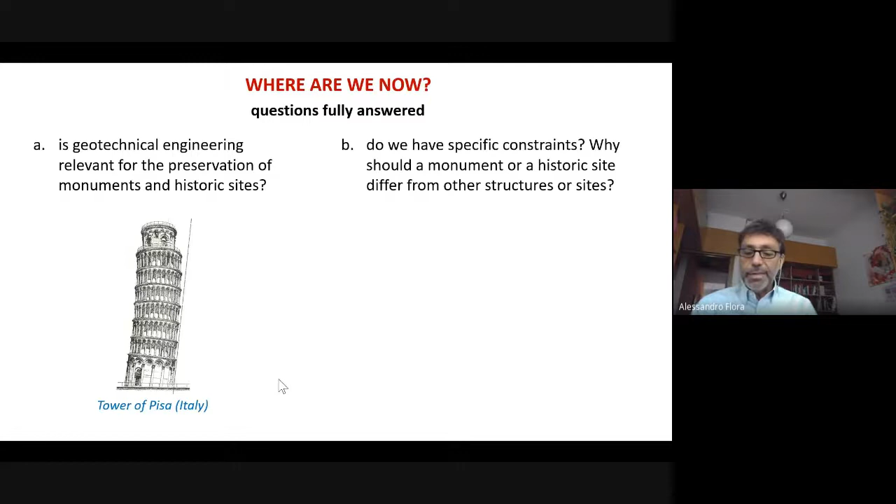And another question which has been fully answered, in my opinion, is, do we have specific constraints? I mean, why should a monument or a historic site differ from other structures or sites? This is not a trivial question, in my opinion, but we now know that we have constraints. You see here in this chart, I will go back to this chart in the second part of my presentation, but I recall it here to remind you that when we deal with monuments we have some constraints in terms of iconic integrity, material integrity, historical integrity, authenticity, which is an elusive concept, but is also very important. And you know, the amount of actions you can do are summarized here.

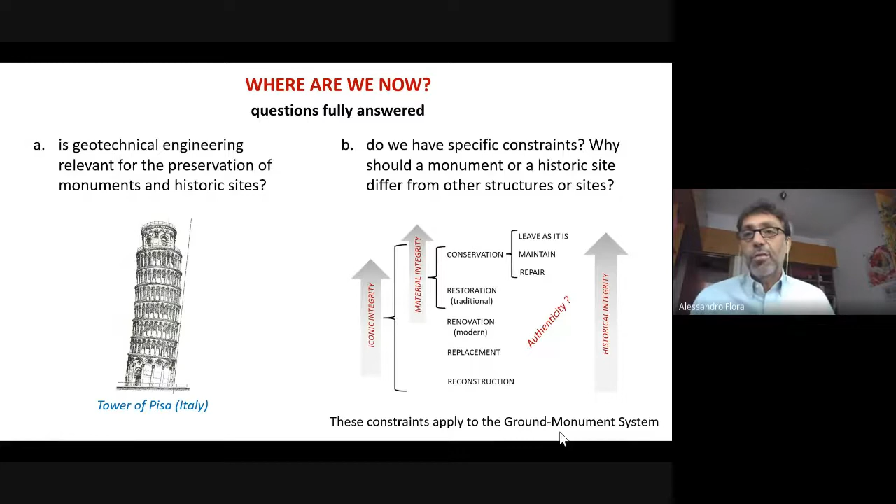So we know that there have been charters issued in the last century that deal with the constraints we have. So the question is answered because yes, we do have constraints, and these constraints apply, as you see down here, to the whole ground-monument system. That means that they apply also to geotechnical problems. So we have to face these constraints. We cannot do anything we want on monuments.

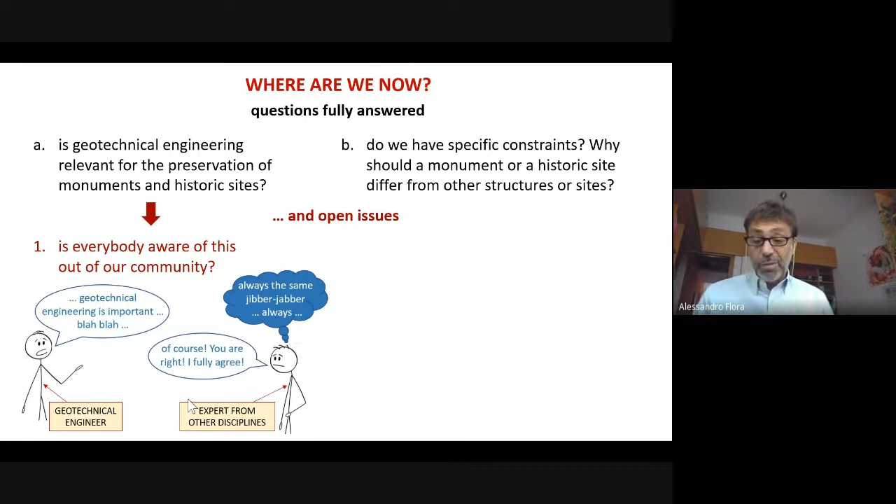Now, if these are the questions fully answered, in my opinion, there are also open issues that say that it is still worth working on this topic. What are these open issues? Well, I list here the main ones in my opinion, of course. The first one is: is everybody out of our community aware of our role? Because we have the experience. You see here a sketch of a geotechnical engineer speaking with some experts from other disciplines. You know, we always try to say that our job is important, and sometimes people are kind to us. They say, yes, of course, but maybe this is not always true, and so they do not involve geotechnical engineers all the time they should be involved. So the first problem is if everybody is aware of the relevance of geotechnical engineering in the preservation of monuments.

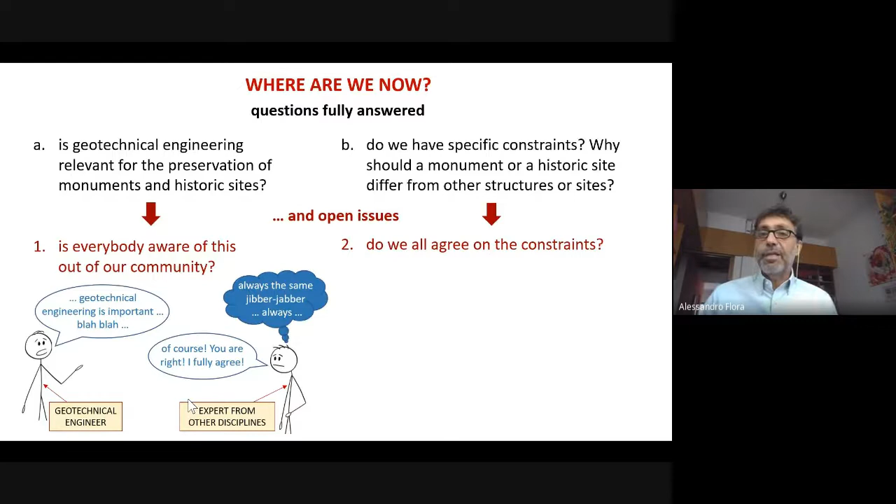A second question is if we all agree on the constraints. We have constraints when we have to approach the monuments, but do we agree on what these constraints are? This is something to be discussed, in my opinion. And the third open issue I have listed here is how big is the gap between theory and practice? Because in conferences and papers, you usually see very nice applications of geotechnical engineering to the preservation of monuments and historic sites. But is this always the case? Or maybe there is a gap, and in practice they don't always do what in theory we say they should do.

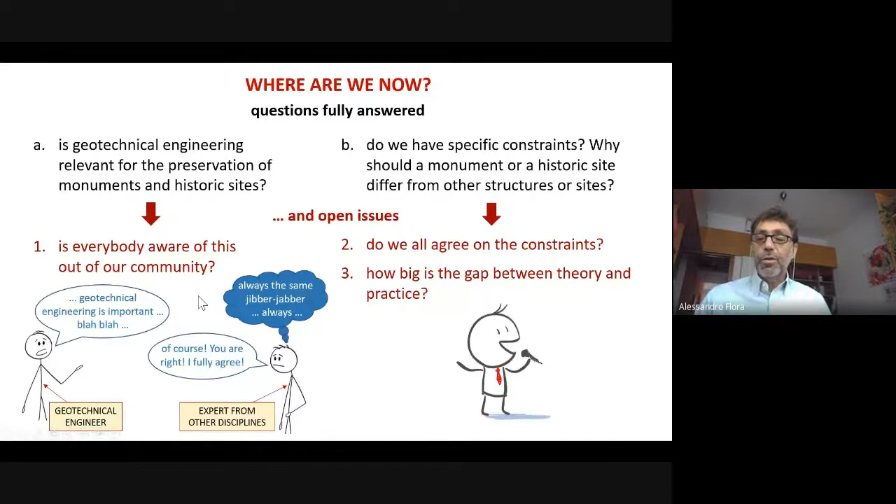So in this lecture I will go through these three issues using some of my personal experiences in the preservation of monuments or historic sites to try and propose a possible answer, which is not definitive, and of course these are topics to be discussed.

Now let's start with the first issue. Is everybody aware of the relevance of geotechnical engineering? Let me start with an example in which I've been recently involved in Central America. It is a Maya site, actually an acropolis in a site named Copan in Honduras.

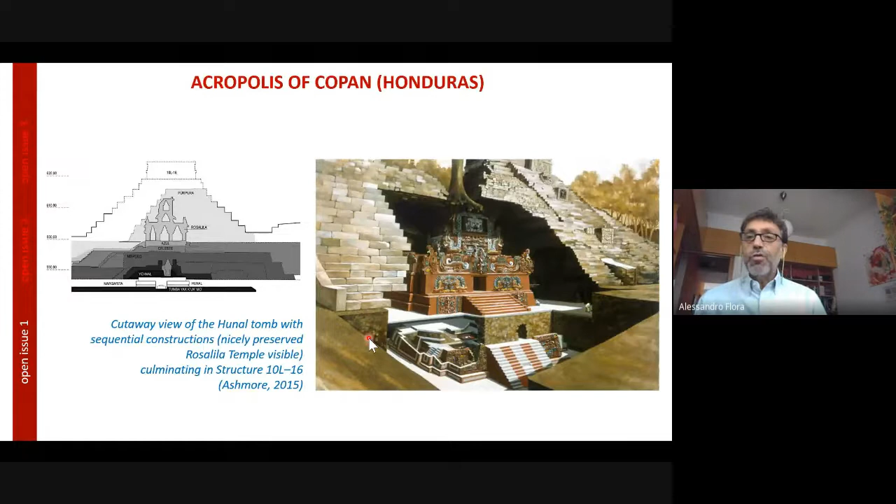What the archaeologists have understood is that the Maya, when the city was growing in importance and size, needed larger monuments. So instead of building new monuments in different sites, they built the new monuments on top of the old ones. So the monuments we see now are a sort of onion with inner layers of older Maya structures. You see here an example of what the archaeologists found in one of the pyramids. Fantastic layering, very important monuments, really worth looking for.

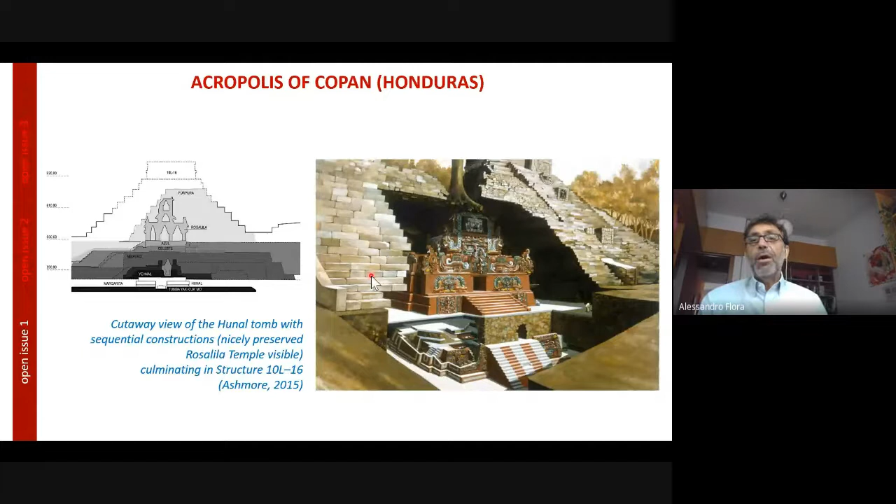Now, how did the archaeologists look for that? They excavated narrow tunnels, about 1.5 meters wide and 2.5 meters high, so very narrow. When the Maya built the larger pyramids, they buried the old structure with unsaturated fine-grained soil, compacted by hand with the technologies they had at the time. So it was an embankment in all cases, and the tunnels were excavated through these embankments.

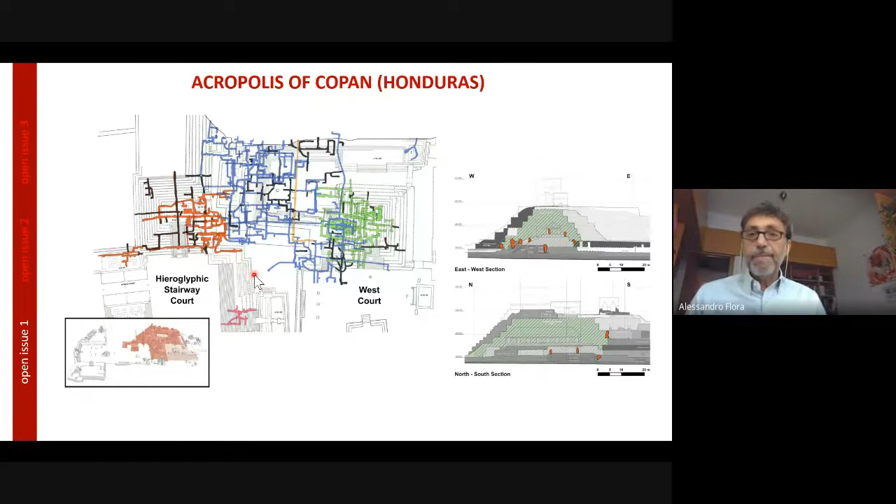You see here an example of the crazy network of tunnels under the Acropolis, because they didn't know what they were looking for. They went forward, found a wall, and turned left or right, down or up. So it is a crazy network, both from a planimetric and an altimetric point of view. This posed a problem, because they started to have collapses in the tunnels. So they started to detect in detail the shape and position of the tunnels. You see here an example of scanning of part of these tunnels.

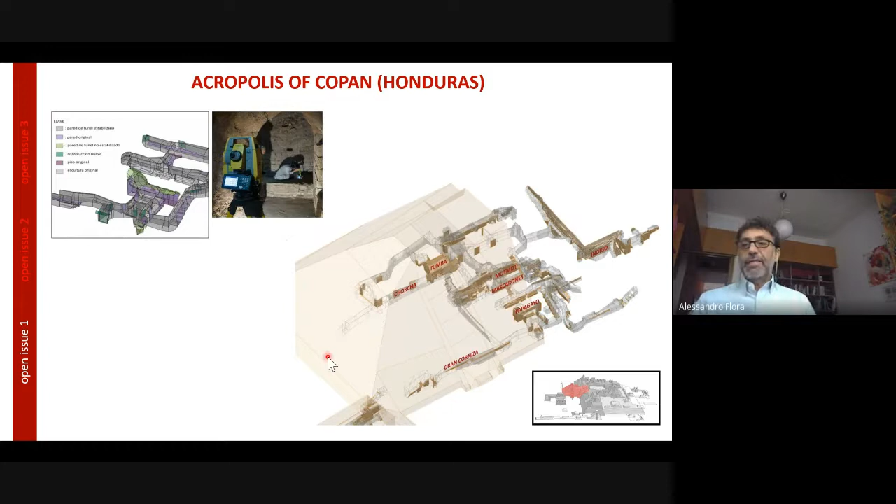Originally all the tunnels were unlined, but as soon as they saw some stability problems, they put different linings on site, in a very spontaneous way, not systematically designed. In the very first cases, like in this figure, they also tried to mimic, which you shouldn't do, the original Maya structure, which also poses some problems to the archaeologists nowadays.

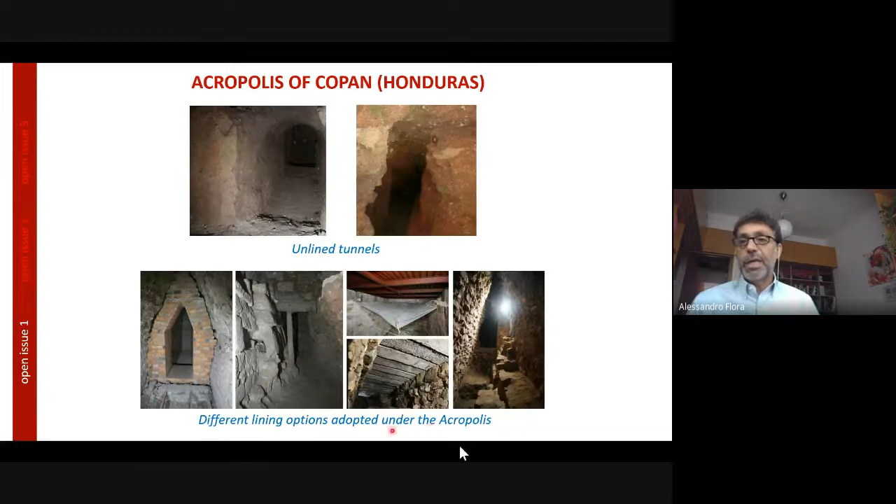All these tunnels are very important, because excavating still reveals extremely fine pieces of art and carved stones inside the big pyramids. So it is very important to keep this pattern of tunnels open, also for tourist visits, because the site is becoming more and more important from this point of view. Now, you see here in one part of the Acropolis the areas where they had problems recently, in the 3 years between 2017 and 2020.

In red, you see the areas where they had large collapses in the tunnels, and in blue, where they had very big water intrusion when they had rain. You see here examples of some local collapses. Most times, and now we understand why, these collapses were triggered at the interface between the lined stretch of the tunnel and the unlined stretch behind.

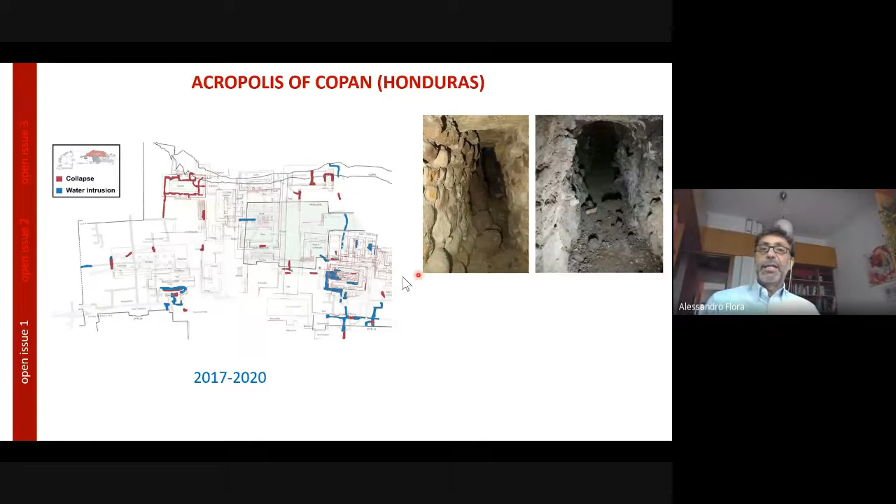Now, you see here that the water was critical. In the 90s, they put an impermeable membrane in one of the plazas, but when Hurricane Mitch struck the area, they got even worse collapses in the tunnels around the border of this, because there was no correct water collection. The water was not collected correctly on the plaza and disposed of, so they had higher infiltration on the border.

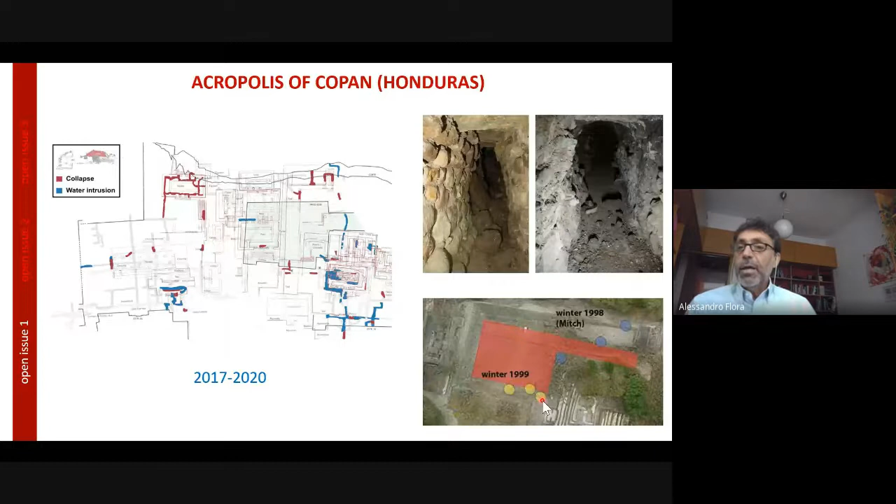Now, why am I telling you all of this? Because clearly there is a problem with water. And the archaeologists from Harvard, who have been working for 50 years at this site, clearly knew it was a problem of water, but they, being archaeologists, had no clear understanding of why it was a problem.

So in 2018 they called Professor Paulo Lourenço from Portugal, who is a famous expert in the preservation of monuments and historic sites, but he's a structural engineer. And when he saw the problem, he immediately understood it was mostly a geotechnical problem. So he was kind enough to involve me in this work.

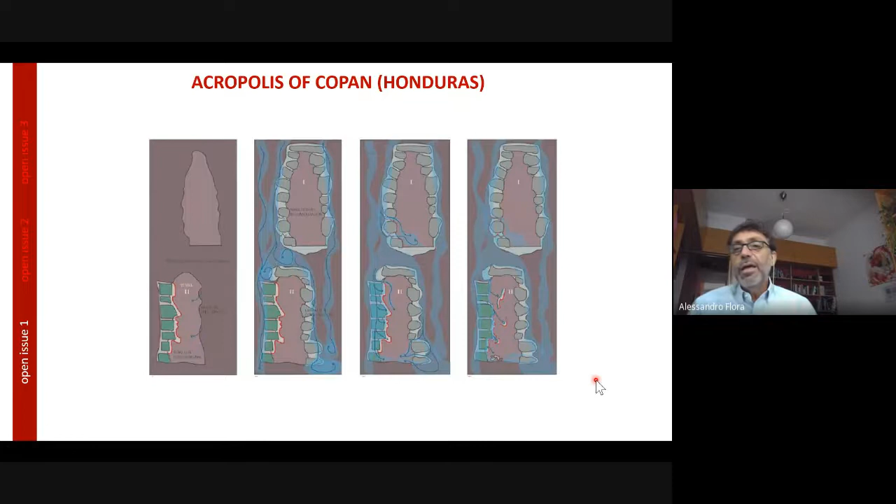So we went to Harvard, we discussed with the archaeologists, and it was relatively simple to understand what the problem was. From a geotechnical point of view, it is actually a trivial problem, because obviously it is a fine-grained material, unsaturated, so of course there is suction in the material, which is a function of the degree of saturation. We could demonstrate by carrying out numerical analysis that this degree of saturation had an effect on stability by introducing an apparent cohesion, which we used in the numerical analysis as a state parameter.

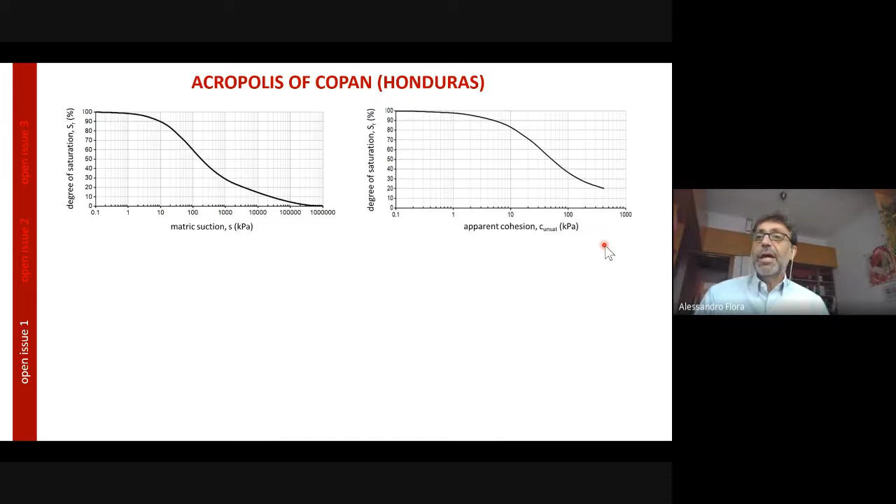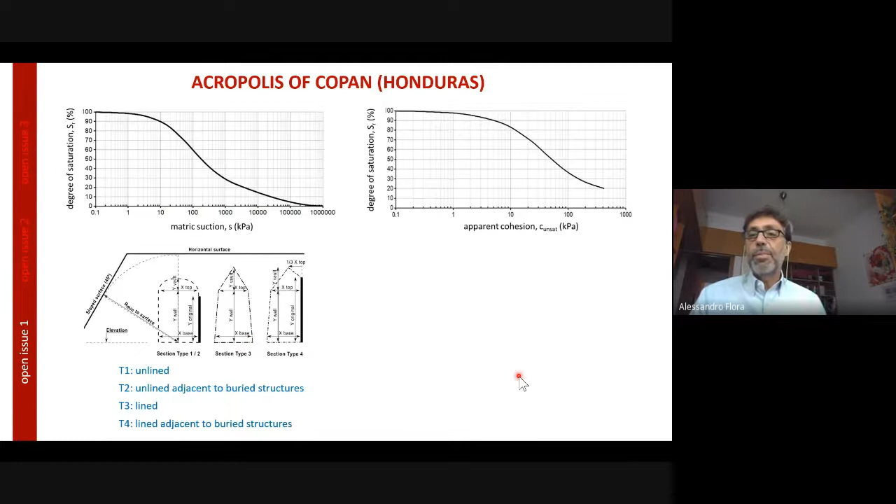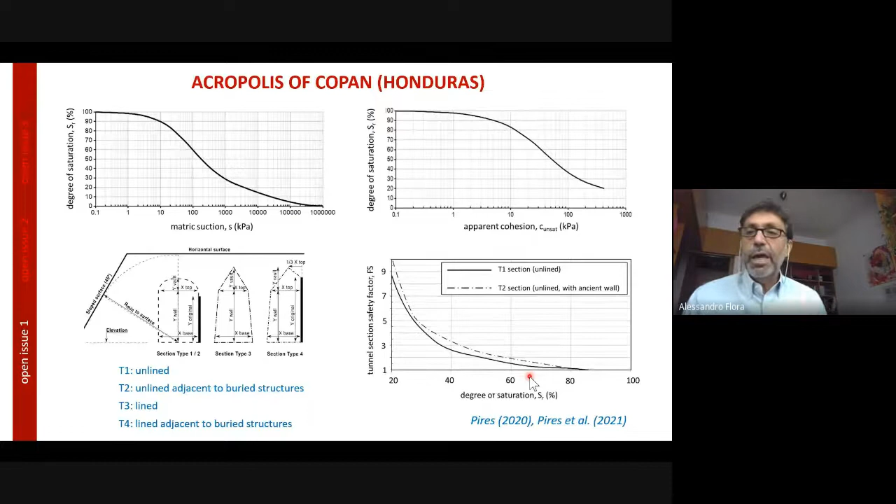So we were able to tell the archaeologists that there is a limiting degree of saturation that shouldn't be overcome to avoid collapse. If this is true, and it seems logical, then it is very easy to think of solutions. Of course, we found that the decrease of suction may be critical, and therefore we need some actions in the medium and long term. Of course, there is always a problem of money when you're working on this kind of site.

So the first thing to do is the need for proper rainwater collection, new lining to be added in the tunnels where possible, but where it is not possible and the tunnels are dangerous because collapse can happen, we suggest to backfill, to close the critical stretches in the short term. Of course, excavating new tunnels elsewhere for safety reasons.

You see here a picture we took in Harvard, at the clubhouse in Harvard. This is Paolo Lourenço, this is myself. These are the leading archaeologists from Harvard, William and Barbara Fash, and all the people also from the Instituto Hondureño de Antropología e Historia, the Honduran institution taking care of the site.

Now, I've shown you this example to show that in this case, good cooperation led to the solution, because from a geotechnical point of view, the solution was easy. It was necessary to work together. So this symbolizes the need for cooperation to solve the problems, because you need skills from different expertise.

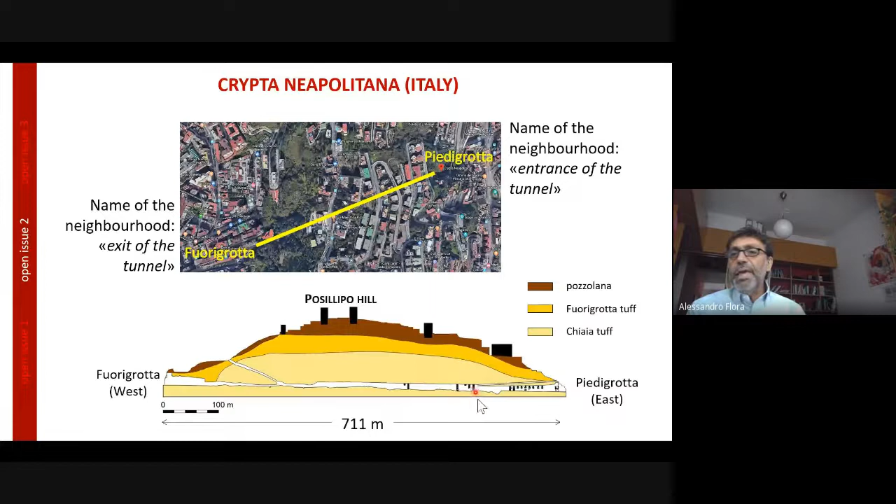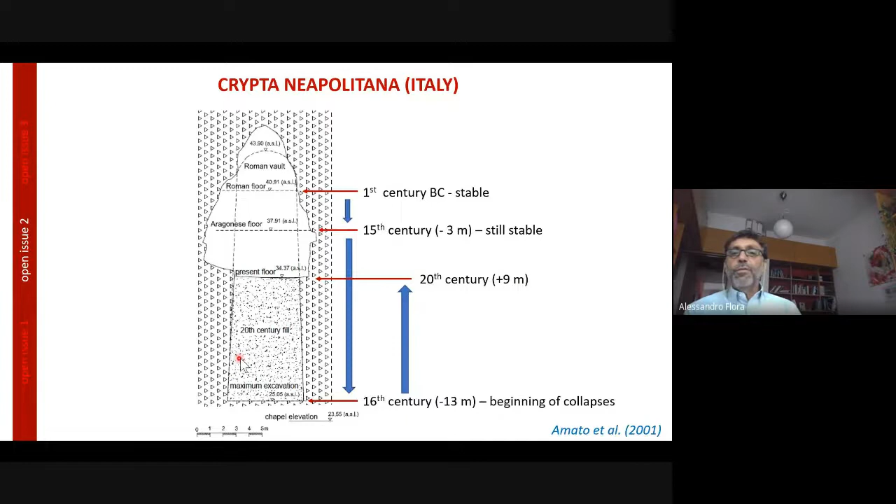I go back here to show that there were masonry arches put in later, but they collapsed in time. So in the 20th century, they decided to fill part of the section, but it was still mostly unstable. So in 1930, the tunnel was closed, and since then it has remained closed. If you ask young Napolitan people what the Crypta Neapolitana is, they don't even know, while it was once the most important road in Naples for a long period. It's really a shame.

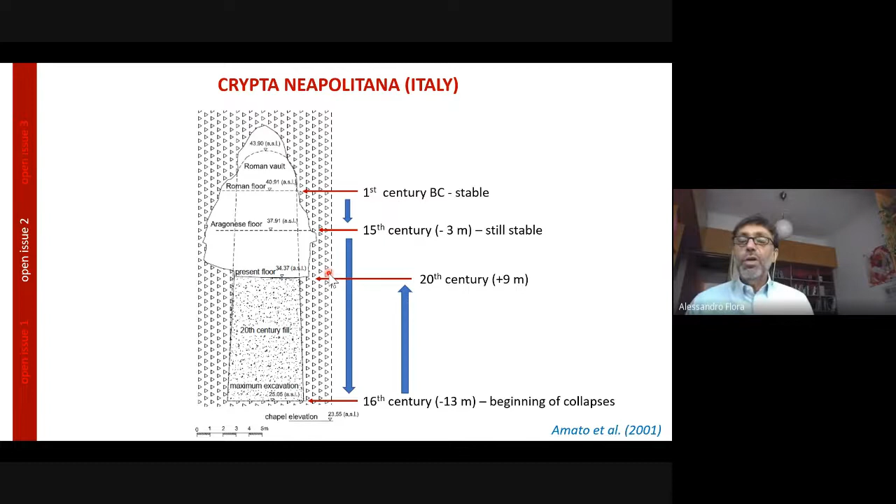I will not go into details of this, but we decided to carry out some numerical analysis. For instance, I will show the analysis in these six sections, from A to F. You see they have different shapes, different cross sections, because they mostly failed at different times in the past.

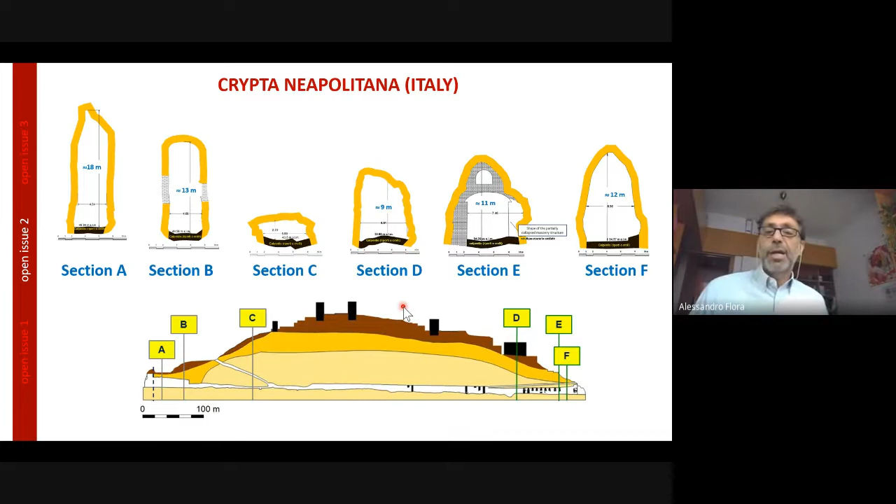These are, very briefly, the outcomes of our numerical analysis, in which we found that the safety factor in the most critical sections is basically 1, confirming the extremely critical situation.

I won't enter into detail, but the numerical analysis also told us where the most critical situations are, and confirmed that tensile failure of the side walls—the white dots are tensile failure dots—are extremely critical, driving our possible solutions.

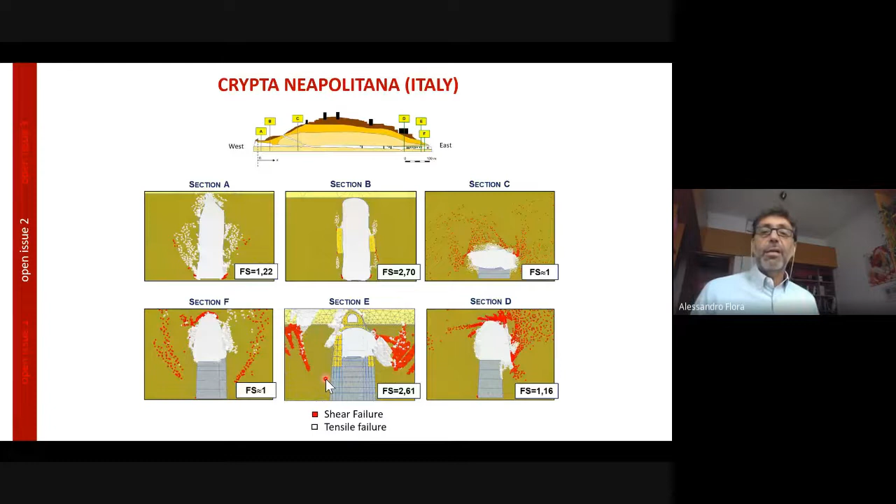So now, again, we should go back to the discussion on the constraints, which is why I'm showing this example. If we want to be very strict in respecting the constraints, we should keep the tunnel closed, because we cannot do anything with it—it's too dangerous, as you see here.

But should we really do that? In my opinion, we can bring this historic site back to the role it once had. It was a connecting path, a very important path. So why not bring it back?

This is the proposal we are carrying out, and we are working on this with the municipality of Naples, because if we believe that functional integrity is a value, then even though we know we are losing some traces of its history, we can carry out works and interventions to restore this monument, this very relevant site, to the role it had in the past.

So what should we do? Removal of small unstable blocks, bolting of larger blocks, partial reshaping, and insertion of a lining—of course, leaving windows to see the old shape and the old masonry—and, of course, supporting the Bourbon arches like this one that are partially collapsed.

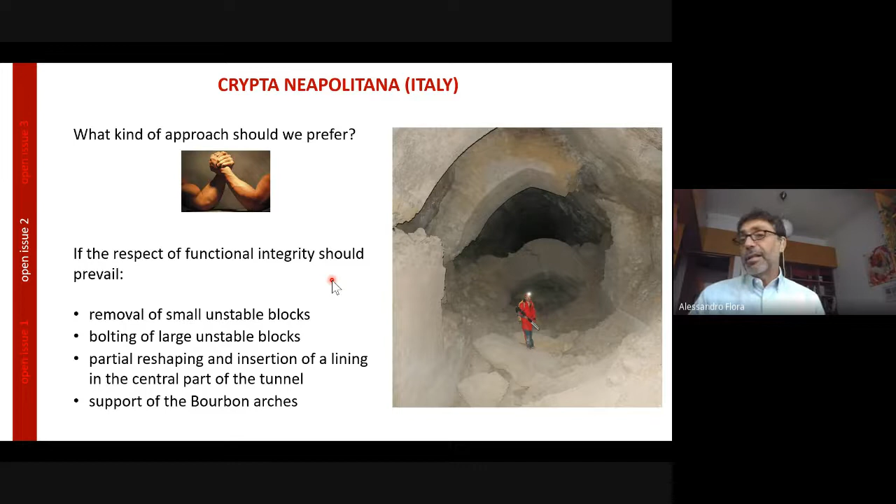Now, let's go to the third and final issue I was mentioning in my introductory part, which is how big the gap is between theory and practice. In a way this can be considered an impolite question, because to answer it we need to show something which has not been done in a perfect way.

I will do this by showing an example I'm currently working on with my Turkish colleagues: the so-called Theodosian walls of Constantinople in Turkey. Constantinople is the old name of Istanbul, so this is Istanbul.

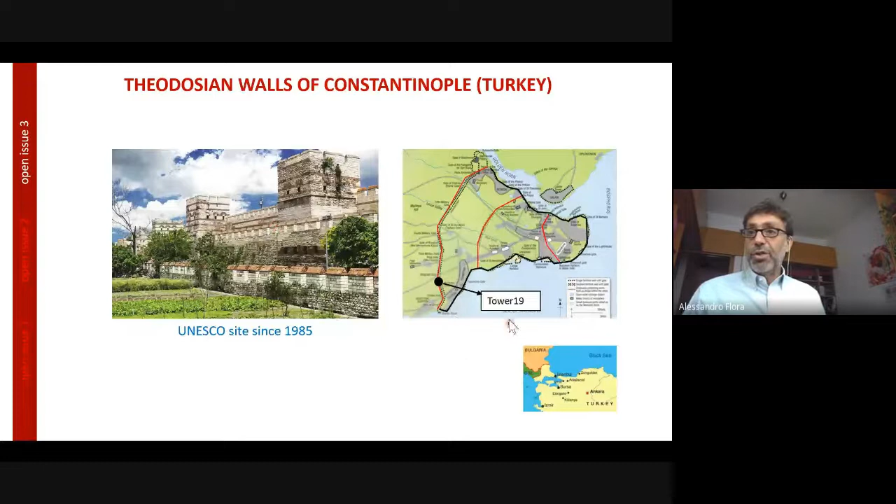Now, it has been a UNESCO site since 1985, and this date is important because after it, they decided to carry out heavy interventions. I will briefly introduce what these walls are, and then go into some detail on the behavior of one of the towers, named Tower 19. This defensive system, built in the 4th to 5th century after Christ, was an impressive defensive system.

Look at here, there are two walls, an inner wall and an outer wall, with a system of towers, inner towers and outer towers, with a site on which the soldiers were at a higher level compared to the possible besiegers, and also a moat which made it very difficult for attacking soldiers to get to the walls.

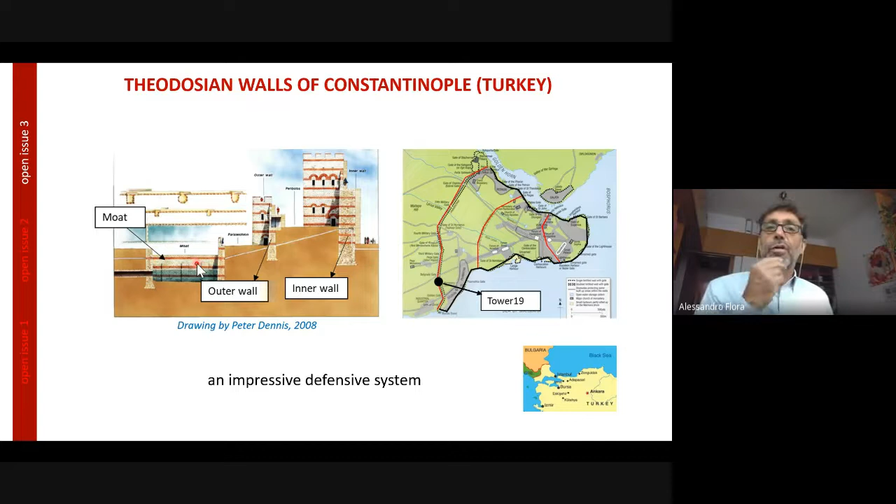Now, it was indeed an impressive system. It became legendary during the Middle Ages. It was constructed by the Byzantine, as I told you, during the 5th century.

And of course, the walls and towers were immediately struck by heavy earthquakes, because it is a very seismic area, as you probably know. But then for many centuries, they had heavy attacks from different armies, but they never surrendered because they were basically invincible.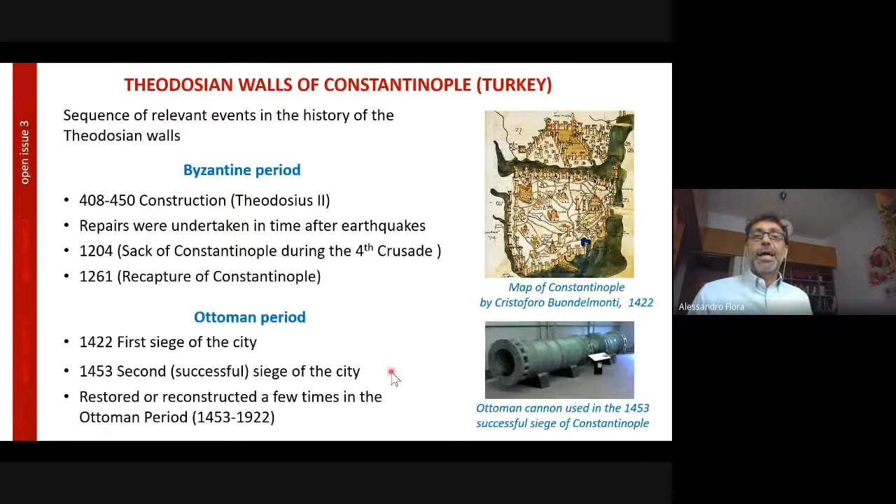They surrendered during the Byzantine period only once, because the Crusaders, in a way, made an unexpected sack of the city, and therefore the city was taken, but then was recaptured by the Byzantine, even though the decadence had started. Then the Ottomans came, and after an unsuccessful siege in 1422, in 1453, thanks to the cannons they had at that time, they succeeded in getting the walls and also the town, and they started the Ottoman Empire, which survived till 1922.

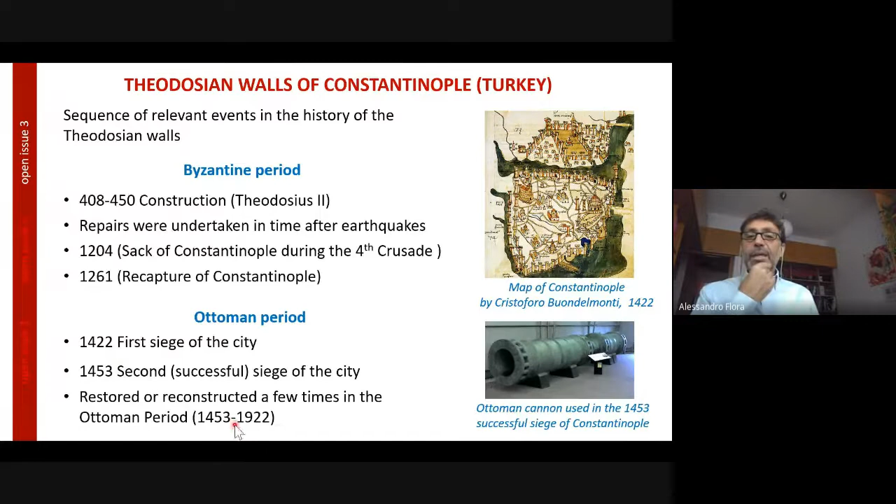Now the walls, you see here a sketch, probably the Ottomans were able to destroy with the cannons the very heavy and important, impressive defensive system, which without the fire weapons probably could not have been possible.

It is important to say that the walls were defeated by people only a couple of times, as I told you, but they were destroyed quite a few times by earthquakes. So there has been a continuous battle between man and nature. Nature was destroying most of the walls, and the inhabitants were rebuilding them.

You see here a map of the main earthquakes in the last 2,000 years, as reconstructed by Ambraseys. And you see here, our tower T19 is here. This is Istanbul. And in 1999, what happened? There was a very strong earthquake, the so-called Kocaeli earthquake, which struck also Istanbul, damaging the towers.

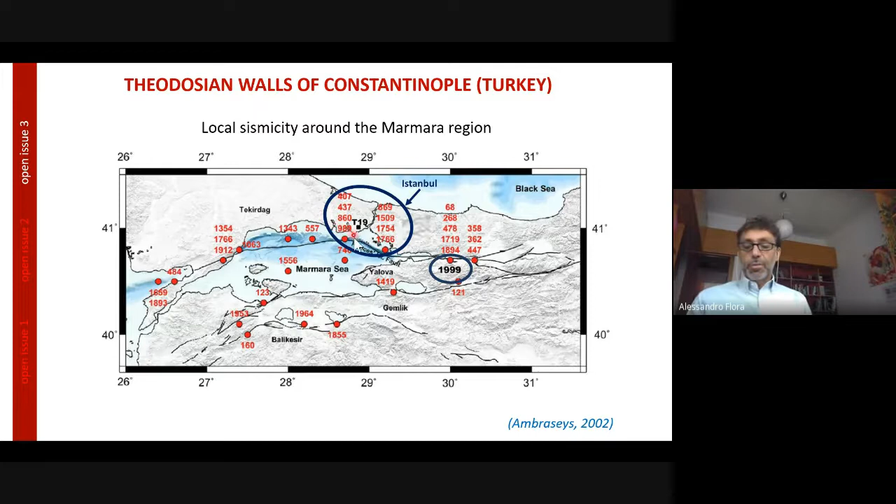Now, let's go to tower T19, which is this one, as you see here. Because since it became a UNESCO site, the authorities decided to heavily reconstruct the walls and the towers. So they reconstructed by mimicking, by simulating, using the old technology.

So as you see here, for instance, in our tower, there was an original Byzantine wall part of the structure. There was an original Ottoman part without the band stripes, the brick bands that the Byzantine used. And then the part that was reconstructed on the side was reconstructed using Byzantine technique.

So from the point of view of constraints, there was no respect. And actually, not only in terms of integrity and authenticity, but also from the functional point of view, because this tower is not defending the town anymore. So there is no functional integrity to set back. Anyway, they had rebuilt the tower as new, and others as well.

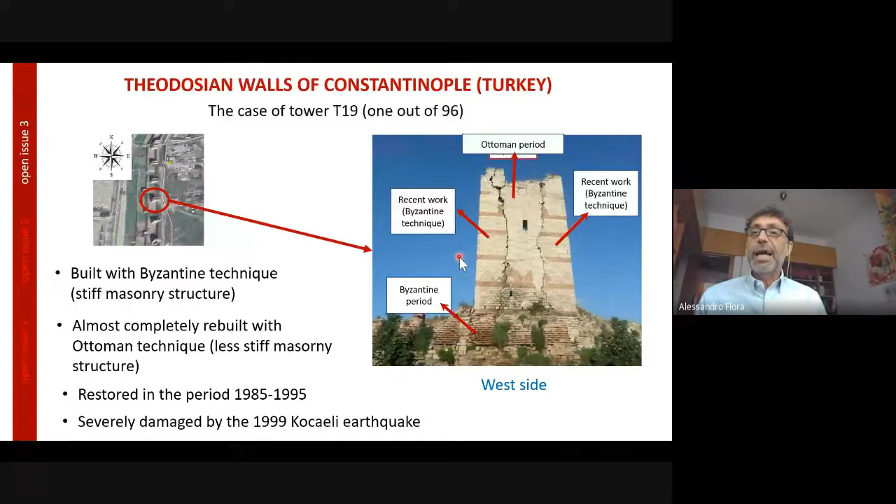But then the earthquake came in 1999 and destroyed most of them. As you see here, you see the different sides of this tower T19. Parts were collapsed, large cracks. You see here typical seismic cracks. This block is on the verge of collapsing. So there was big damage to the wall as well.

Now I'd like to quote this sentence from Professor Ahunbay, who is the chair of historic preservation at Istanbul Technical University. This is what he said after the 1999 earthquake. I quote: 'The restoration campaign of the 1980s must be criticized due to its resort to the reconstruction of ruined towers and gates instead of stabilizing and consolidating dangerous structures.'

The performance of the 20th century repairs, the ones I told you, during the recent 1999 earthquake constitutes a good lesson for future restoration. So Professor Ahunbay is saying, why did you concentrate on the shape? Now we have the knowledge to do better. Why should we keep going on and on in this endless game between man and nature in the destruction of this structure?

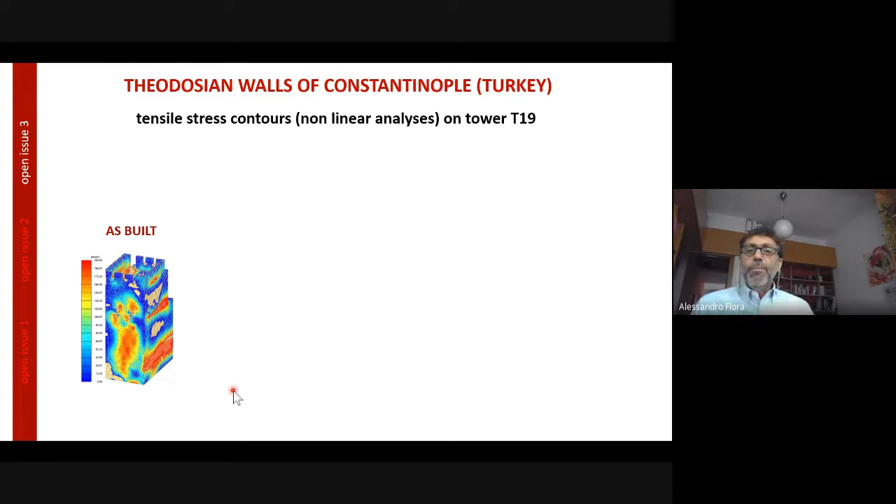So we also considered what would have happened if we had some mitigation measures. For instance, I am working now on a very soft action, which is lateral disconnection at the foundation level. If you disconnect a foundation, you highly decrease the rotational stiffness, so increase the compliance, and so you increase the elongation of the natural period, in terms of equivalent elastic behavior. But you see from the nonlinear analysis that since the foundation is too shallow, still there are very critical sections in which the masonry fails under the seismic action.

So we also consider different options like soft barriers. We are working on a geotechnical seismic isolation technique, which is a soft grouting in which you inject a grout which has a low normal stiffness on the sides and a low shear stiffness on the base, and the situation gets better. You see the colors become cooler, tending to blue, but still this is not sufficient, and to be honest, it is also a very complex way to intervene on a site.

The best option would be moving in the other direction. Instead of lowering the stiffness at the base, at the foundation level, you can grout around the base, stiffening the soil, so moving towards the origin of the response spectrum. And if you also do some retrofitting, so some intervention on the masonry, you can have

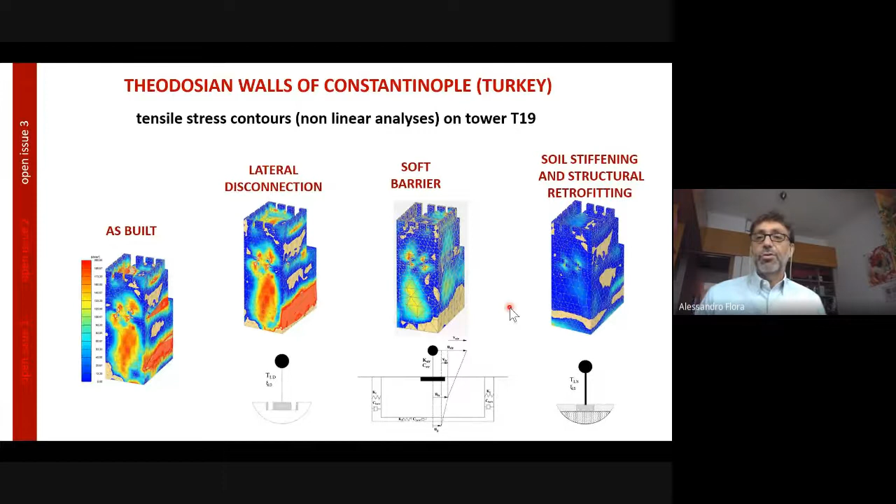on the role of geotechnical engineering in terms of the risk of lack of cooperation, it is obviously essential to share the responsibility of technical solutions with experts from other disciplines. We have said that. This cannot be but based on multidisciplinary considerations, but of course, this multidisciplinarity must include geotechnical engineering. We have tried to demonstrate that most times geotechnical engineering is important to understand the critical situations and to propose respectful interventions. So this is in terms of lack of cooperation.

In terms of cultural isolation, I'm speaking to people mostly from Asia, and I'm from Europe. I am fully aware that in past preservation actions, the framework has been mostly European, Europe-centered, let's say, which is not what it should be, in my opinion. First of all, let me say that hibernation of heritage is not the only solution. So we shouldn't freeze the cities as they are. We should not be afraid to intervene on the structures because it can be worth it to increase the functional integrity, possibly to bring it back to where it was.

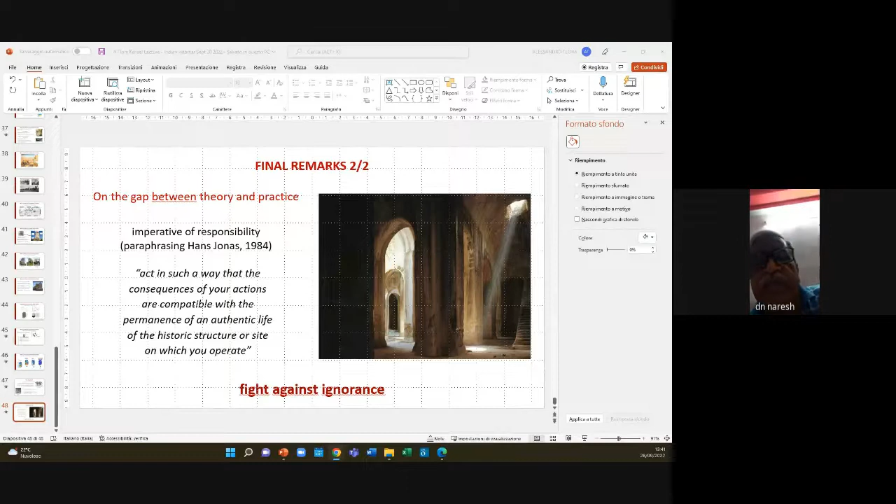You mentioned geotechnical engineering looks at multidisciplinary considerations. In your tunnel, first done by Rome, later in the 15th century, and today we have the tunnel boring machine, developed by Germans and used in our metros, and also in Naples. So why was this not used?

Well, because in the tunnel that you have mentioned, there is no need. I mean, tunnel machines, first of all, are extremely expensive tools, and they are usually used, at least in Italy, for long tunnels. It's worth using tunnel boring machines for large tunnels, long tunnels. This is not so long. Then the tunnel exists, so there is no need for such a heavy intervention.

I mean, it is absolutely possible. There is not much to excavate. There is much more to sustain on the sides or to remove the blocks. Because if you put in place a tunnel boring machine with precast facing, you would have a modern tunnel, which is not the case. We want to have functional integrity. That is, we want to allow people to go through, use the tunnel again. But still, when they walk into the tunnel, we would like them to see that they are in a very historic tunnel, not in a subway tunnel.

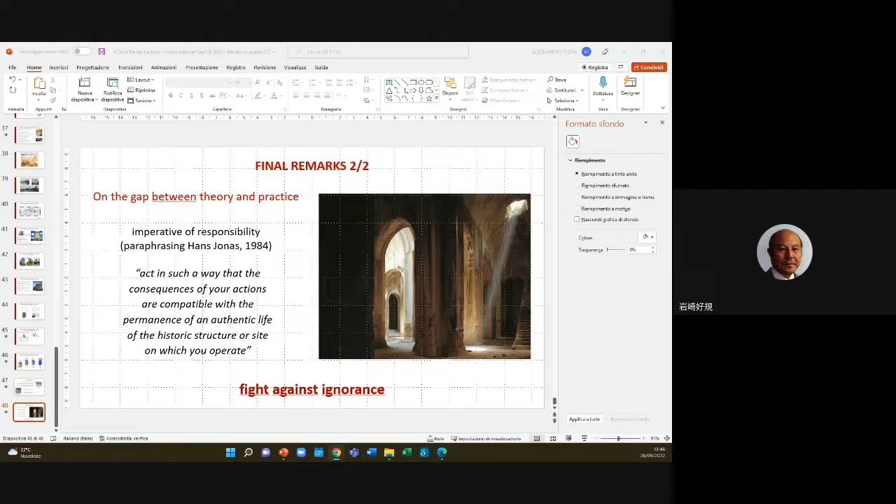The next one is the Tower 19. Tower 19, what? Seismic response. Please show me the ground layers for the response analysis. Yes. You mean now? Now, yeah. Let me. Do you see my screen? Yes. Let me show you here.

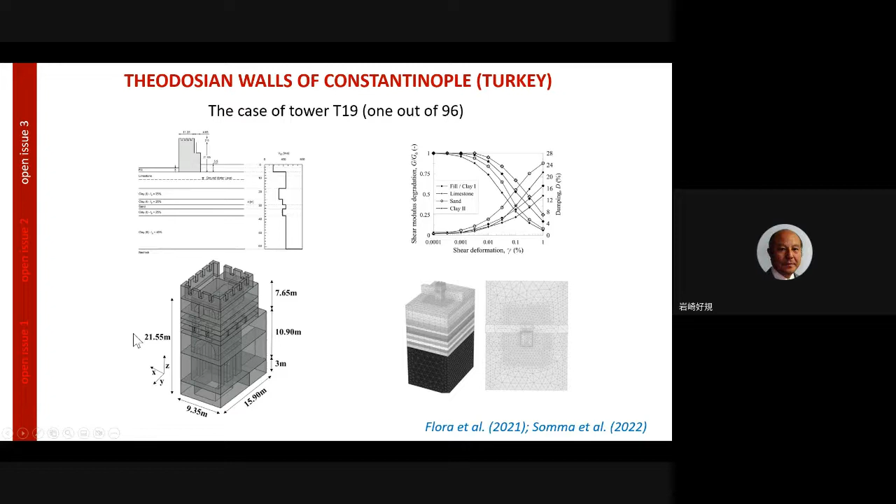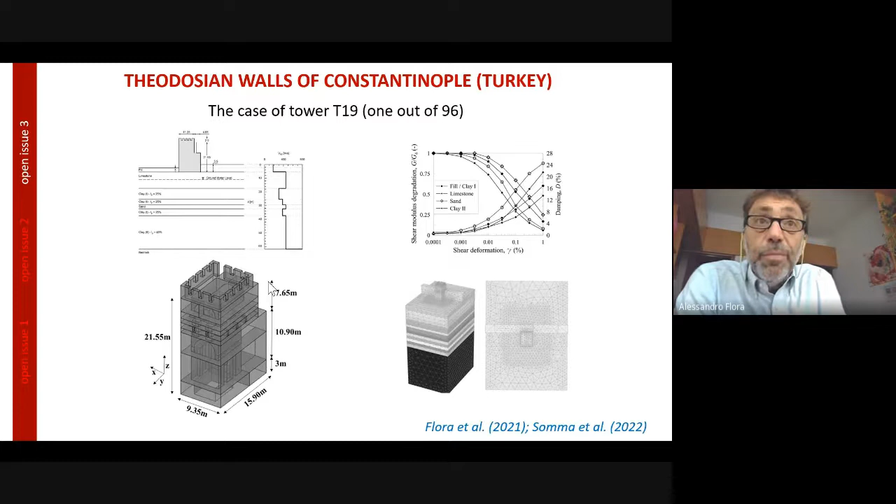The base of the structure, the tower, is on very hard limestone. The shear wave velocity is nearly 400 meters per second. So it is very stiff, stiff soil or soft rock type. Yes, it's a soft rock. And what I wanted to say is that even though it is a very stiff material, with soil structure interaction, you see here, the elongation of the period from fixed boundary to fully compliant is not so significant. Since we are on the rising branch of the response spectrum, there is a huge increase in the seismic demand. The pseudo acceleration is much higher, twice as much.

So even though the soil is very stiff, it's a soft rock, as you said here. And this is also the reason why, in this case, the lateral disconnection was not effective, because by removing the soil on the sides, you don't solve the whole problem. Right, because it is very stiff.

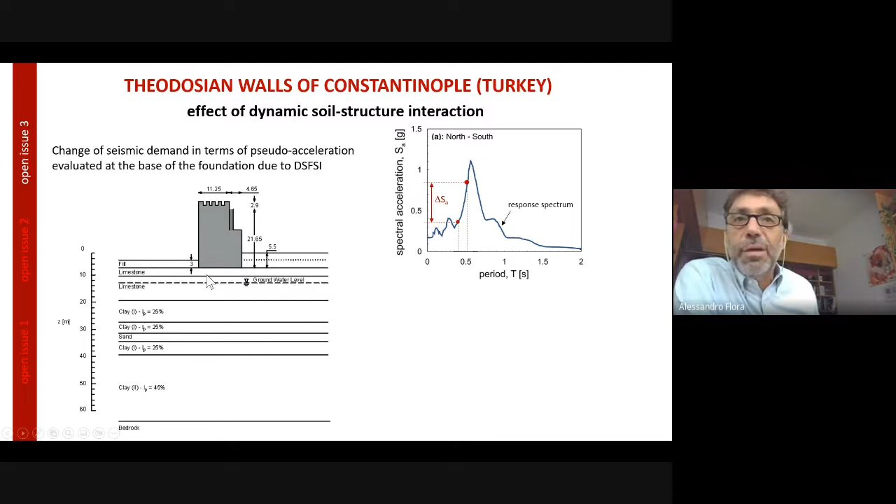But you know, some of the towers, I didn't have time to go through this, but some of the towers, because there are more than 90 towers, are not founded on such a stiff material. And in that case, lateral disconnection can be very effective. Yeah, understandable. Okay.

Those differences of the spectral acceleration are mainly due not to the soils, but to the upper structure characteristics? Well, no, the difference from this to this is the elongation of the period, which depends on the lower stiffness of the system, because it is more compliant. It is a stiff material, but still not as stiff as an infinitely stiff material.

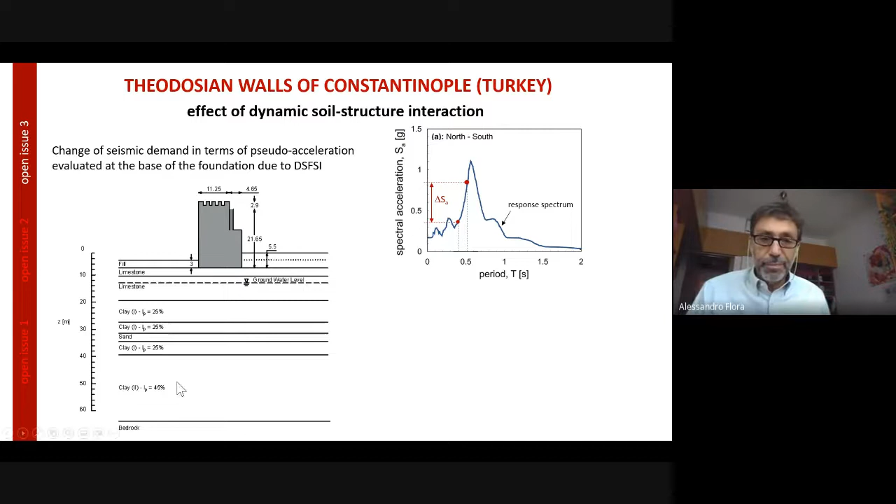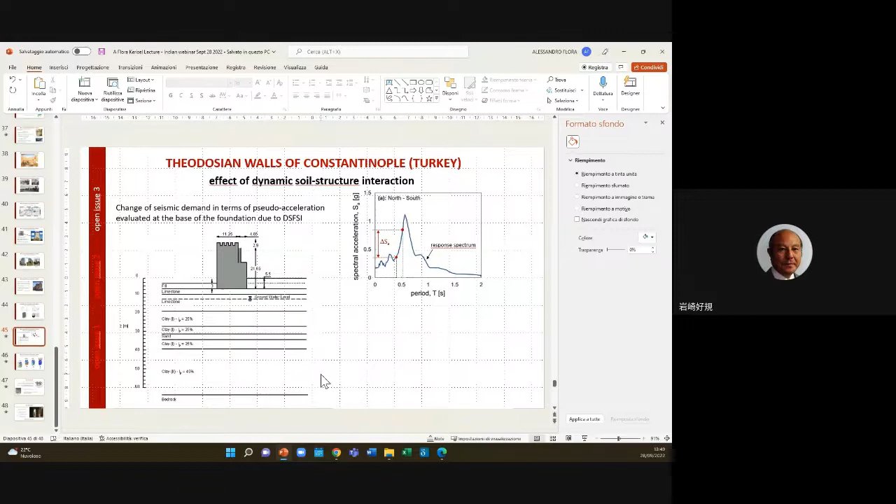Oh, really? Okay. Maybe I need some time to understand. Okay, yeah, thanks very much. Goodbye.

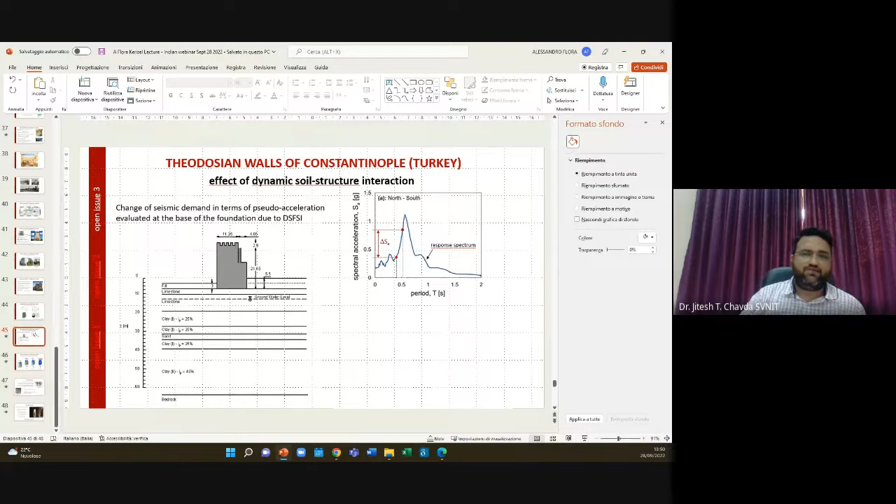Yeah, so we can end the session here. And let me summarize Professor Flora's lecture. He has talked about the Kerisel lecture and the relevance of geotechnical engineering, especially for the preservation of heritage sites. And then he discussed with us in much detail the three issues related to historic preservation, and he focused more on the functional integrity. He discussed three case studies.

The first one is on the Acropolis of Copan, that's in USA. Honduras, not USA. Yeah, I'm sorry, it's in Honduras. Okay. And then the second one is Crypta Neapolitana, it's in Italy. And the third one is the Theodosian Walls of Constantinople. It's in Istanbul, Turkey. Very difficult. So really, we had very interesting discussions.